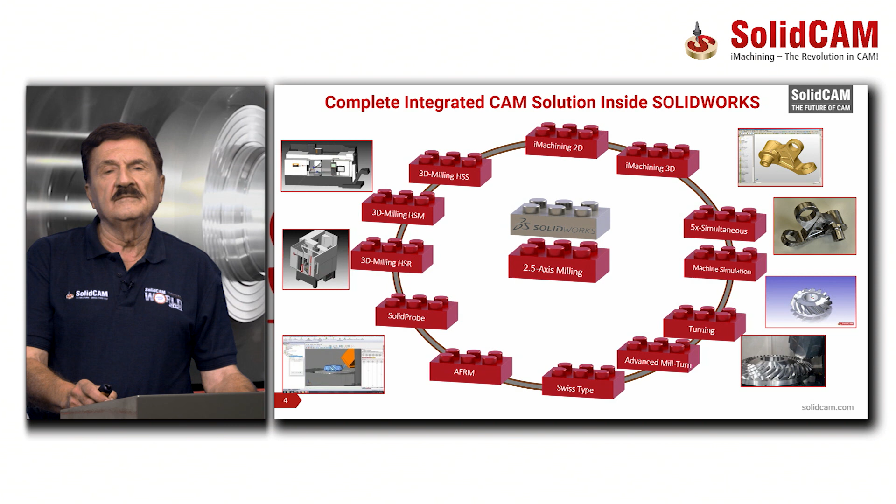We have our great technologies, iMachining 2D and iMachining 3D, a must for every customer, and I will explain more about it. To the right, you see our 5-axis simultaneous and machine simulation capabilities.

Our turning, advanced mill turn and swiss type - as you know, we have the best solution today in the market for these two categories, advanced mill turn and swiss type. And as you see on the left, we have also our product, SolidProbe, useful for any machine shop using probes.

So we say that SolidCAM is the one CAM solution for all your CNC machines, starting from 2.5D to 3D to 4-axis indexial, 5-axis indexial, 5-axis simultaneous, and advanced mill turn and swiss. And as your CNC machine becomes more complex, we give you more customer value to get your CAM programming done the fastest and easiest way.

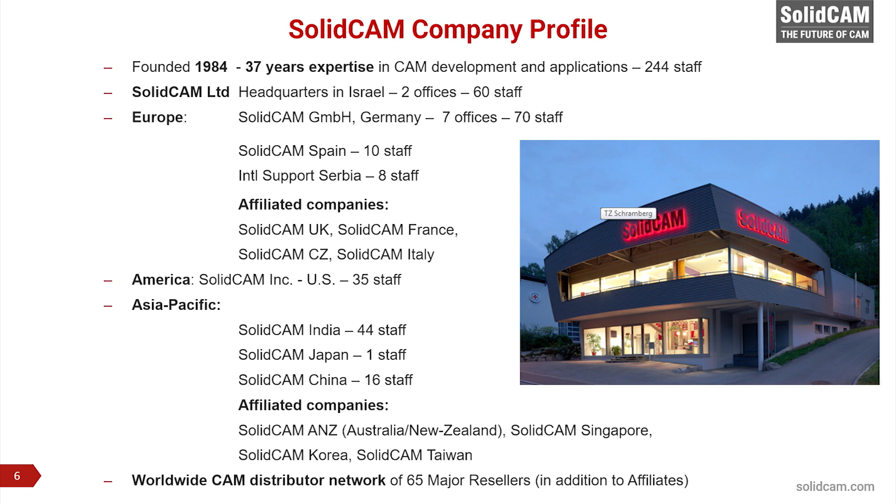A short review of our company today worldwide. We have 244 staff, our own staff worldwide. Located in our headquarters, we have 2 offices with 60 staff. SolidCAM GmbH is our European headquarters in Germany, with 7 offices and 70 staff. We have our newly established SolidCAM Spain with 10 staff, and our international support team in Serbia with 8 staff.

We also have affiliated companies in Europe: SolidCAM UK, SolidCAM France, SolidCAM CZ, and SolidCAM Italy. In North America, we have SolidCAM Incorporated, handling both US and Canada with 35 staff. In Asia Pacific, we have SolidCAM India, SolidCAM Japan, and SolidCAM China, and affiliated companies SolidCAM Australia and New Zealand, SolidCAM Singapore, SolidCAM Korea, and SolidCAM Taiwan.

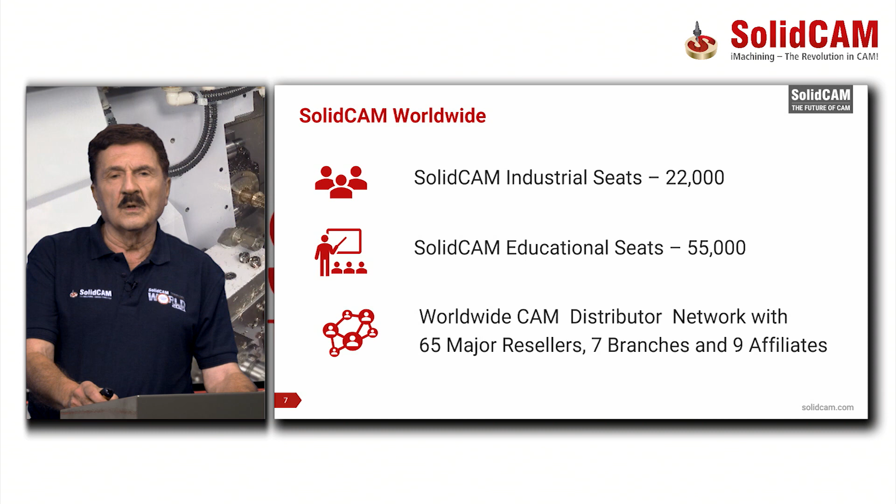In addition to all the branches and affiliates, we have a worldwide CAM distributor network of 65 major resellers. So as a complete picture today of SolidCAM worldwide, we have 22,000 SolidCAM industrial seats, 55,000 SolidCAM educational seats, and a worldwide CAM distributor network with 65 major resellers, 7 branches, and 9 affiliates.

You see here an example of our SolidCAM international customers. For example, in aerospace, we have Rafael, Dornier, Airbus. For automotive, you see Daimler Chrysler, Volkswagen, Nissan, Kia, Hyundai. We have customers in machine design, electronics, medical - for example, you see in the middle, Boston Scientific. This is one of our biggest customers in the US.

They are a very big customer of SolidWorks, and they have about 20 seats of SolidCAM, and they were our first customer in North America. We have customers in optics, military, consumer, energy, production shop, mold tool and die, prototyping, and technical education. So SolidCAM customers today include both small and medium-sized job shops, medium-sized engineering and manufacturing companies, and large aerospace and automotive companies.

Now I just want to talk about our integration. This is our strategy that led us to so much success. When we decided not to develop our own CAD system anymore, we had a CAD system in the past, and we decided to integrate into the famous CAD systems available. So we integrated into SolidWorks in 2000, finished our integration in 2002, and got our gold certified partner status in 2003. We have also had an OEM agreement with SolidWorks since 2003, where we could supply you with a complete CAD/CAM solution, an OEM of SolidWorks with SolidCAM.

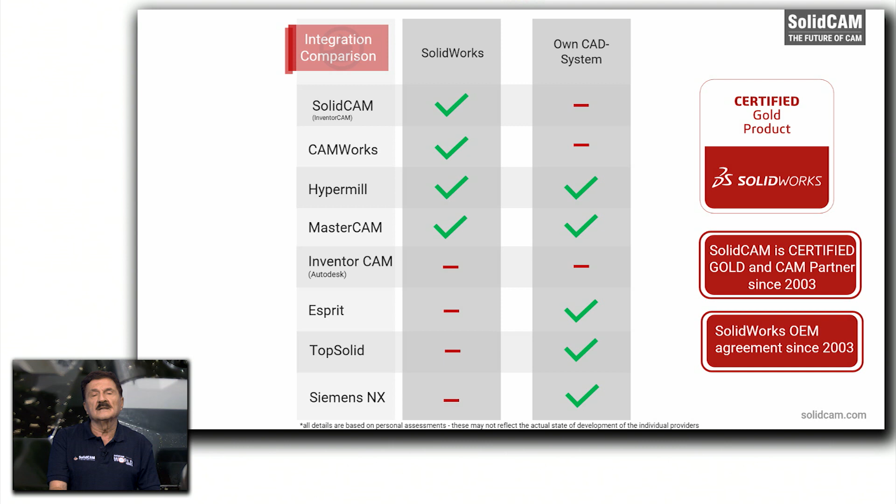So what happens if you have your own system, you put your major development into it, and what happens with the integration with SolidWorks is it withers away. So practically speaking, you can never find a happy customer anywhere using Mastercam integration in SolidWorks, and Mastercam always pushes the version with their own CAD system.

So today, if you are a customer already using SolidWorks for design of jigs, fixtures and other small designs, and you want to continue in the same environment, SolidCAM for you is the ultimate and perfect combination with your SolidWorks, because it's seamlessly integrated and you feel you are working in one system, SolidWorks and SolidCAM.

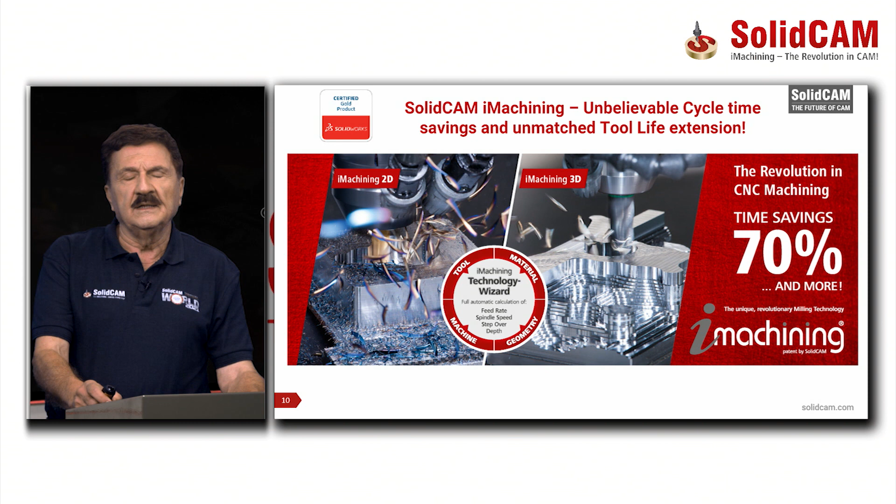Now I want to talk about our great SolidCAM iMachining. This technology provides unbelievable cycle time savings and unmatched tool life extension. Maybe many of you have already heard about this technology, maybe some haven't, so I'm going to make a short summary. As you see in this slide, we have two versions of iMachining: iMachining 2D for prismatic parts, and iMachining 3D for complex surface parts.

What are the advantages of iMachining 2D? First, increased productivity due to shorter cycle time, savings of 70% and more. You have dramatically increased tool life, sometimes as much as 5 times or even more, with the tool lasting much longer compared to regular toolpaths. You have unmatched hard material machining — for iMachining, the harder the material, the more the savings. You also have outstanding small tool performance, which is very important for different kinds of industries.

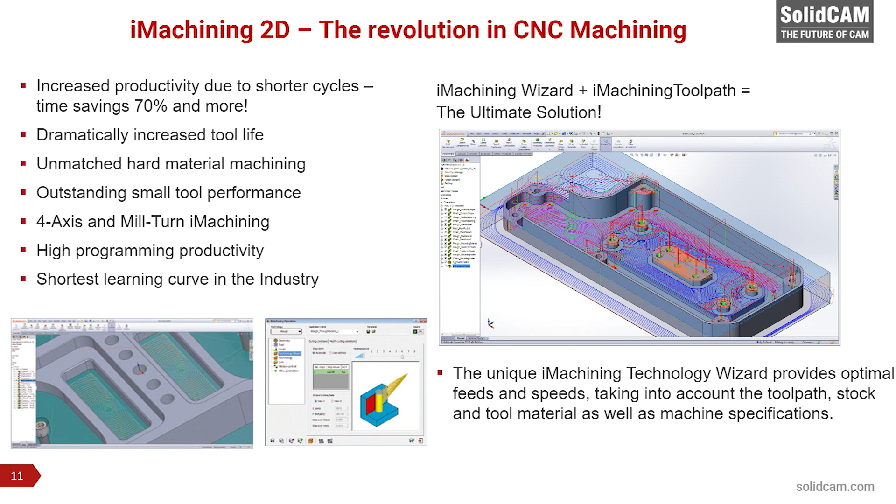You can use iMachining both in 4-axis and mill-turn, and we'll see some video on that. You also have very high programming productivity and a very short learning curve.

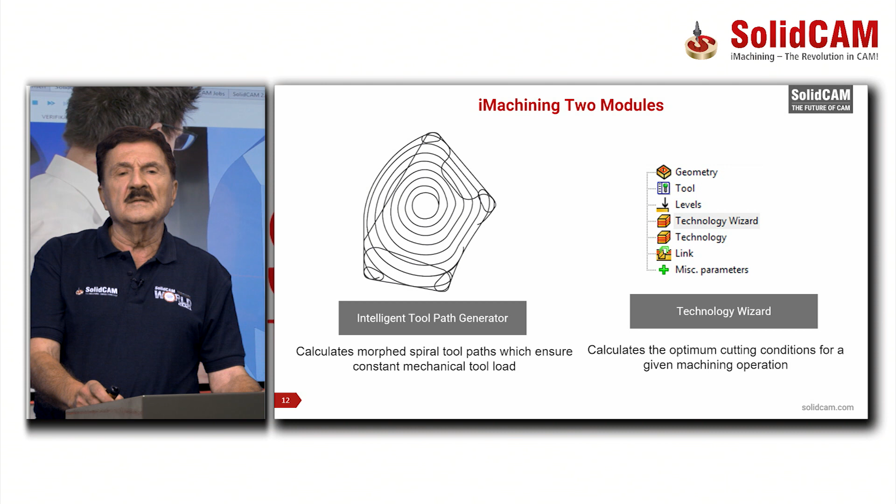So let's look more in depth at iMachining. iMachining has two modules. First, on the left, the intelligent toolpath generator. It calculates morphed spiral toolpaths, which are the most efficient toolpaths, and it always ensures a constant mechanical tool load on the tool while it's cutting.

On the right, you see the second module, the technology wizard, which is unique to SolidCAM. It calculates the optimum cutting conditions for any given point on the toolpath.

So what input does the user give to iMachining? You just define the minimum cutting angle you allow and the maximum cutting angle, let's say between 10 and 80 degrees. So while the cutting tool is working, the cutting angle varies according to the situation between the minimum and maximum, and as the cutting angle varies, the feed also varies.

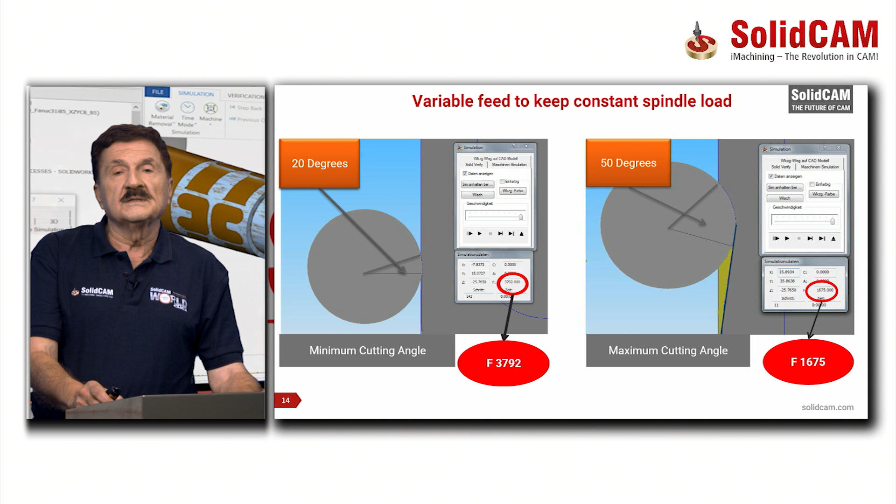For example, you see two examples: to the left, you have a high feed, because we have a small cutting angle, so you get a high feed. To the right, you see the cutting angle has increased, so the feed has reduced.

So these values are always varying along the toolpath — the cutting angle and the feed — but always the net result is constant load on the tool and constant spindle load. This is the unique character of iMachining.

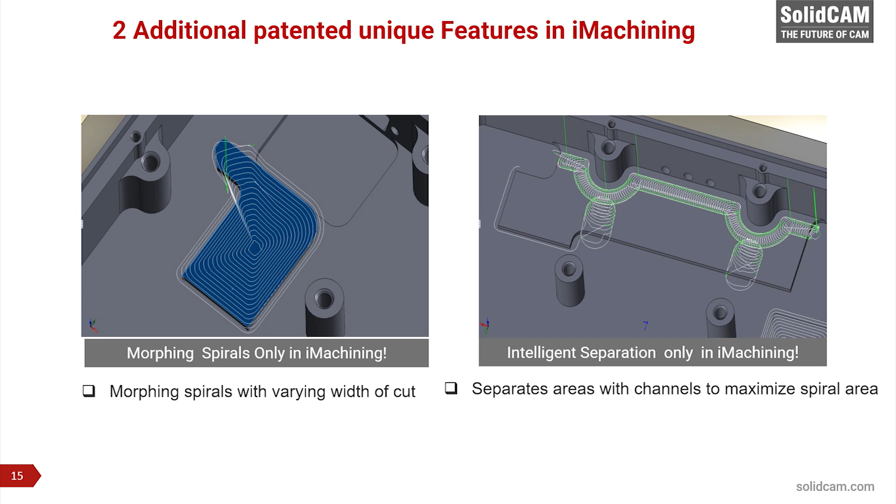Let's look at two additional patented unique features in iMachining. To the left, you see our morphing spirals. These are spirals that take the shape of the area below it, morphing itself to fit. And the second feature is our intelligent separation in iMachining using toroidal toolpaths.

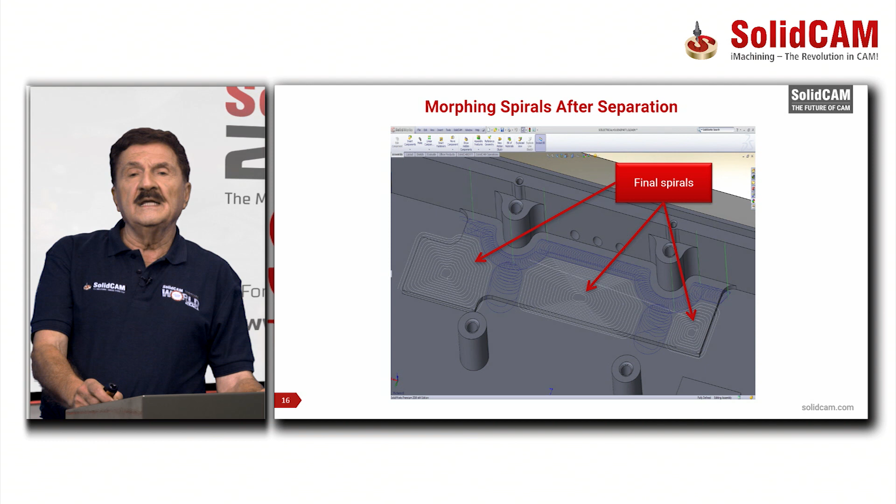Let's see an example. This area had to be machined with iMachining, but you couldn't do it with one morphed spiral. So, as you see in blue, the toroidal toolpath divided this area into 3 sub-areas, and each sub-area is machined using morphed spiral. The target of iMachining always is to do the maximum of the cutting using morphed spiral.

With iMachining, we not only do the roughing, but also the rest roughing and finish. So iMachining 2D is unique in that it completes the whole process for prismatic parts: roughing, rest roughing, and finishing.

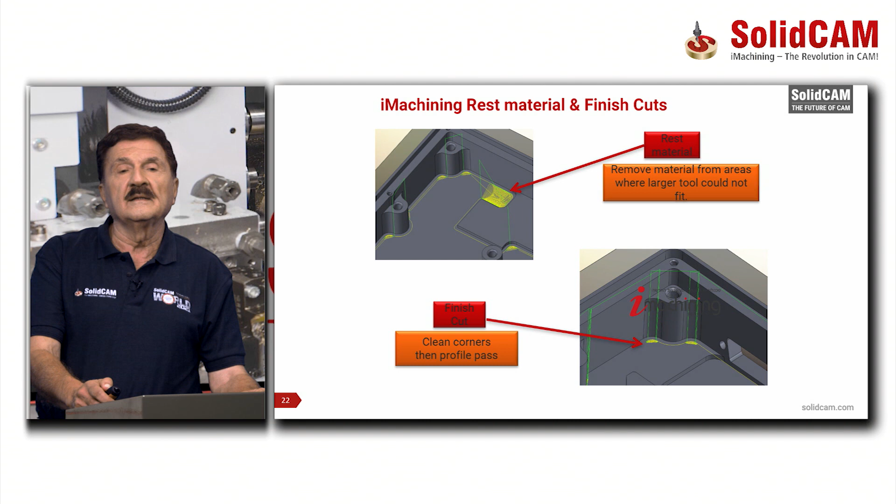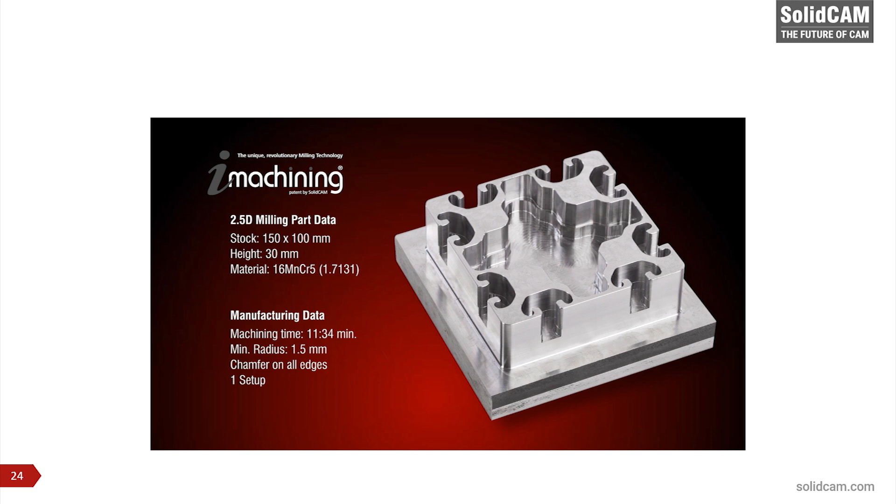Okay, here we see the material cutting starting. See how deep the cut is. Usually in iMachining, the cut is always maximum depth. Now the tool is trying to get into the full depth of that pocket, and then when it reaches the bottom, it will start doing the morphed spiral cutting of this hard material.

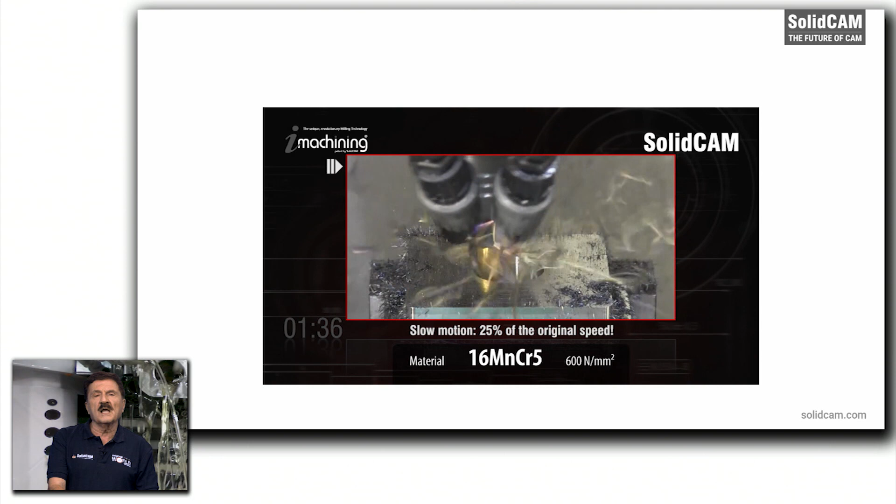The speed at which it works, you'd think it's aluminum. No, it's 16MnCr5 steel, and you see the maximum speed at which the tool is working. And you see the chips are always the same size. This is a trademark of iMachining.

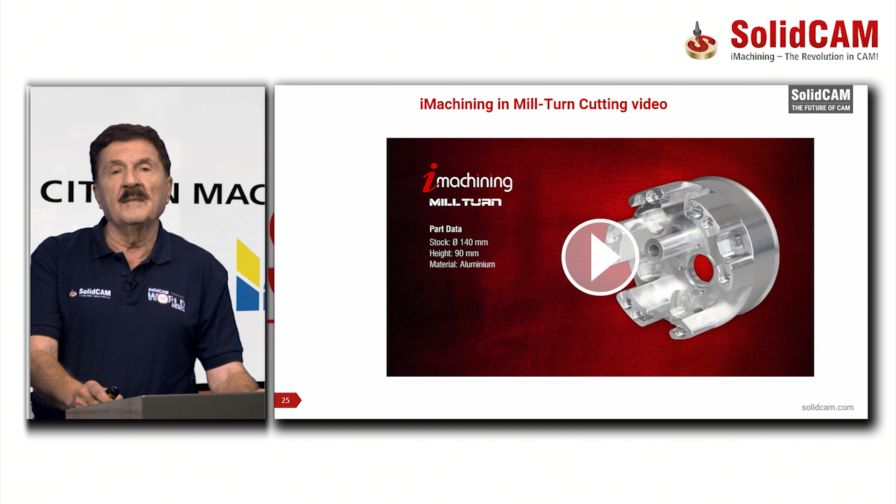iMachining also can be used not only for 2.5D prismatic parts, but as I said before, also in mill turn. Let's see an example of a medical part cutting in a mill turn using iMachining.

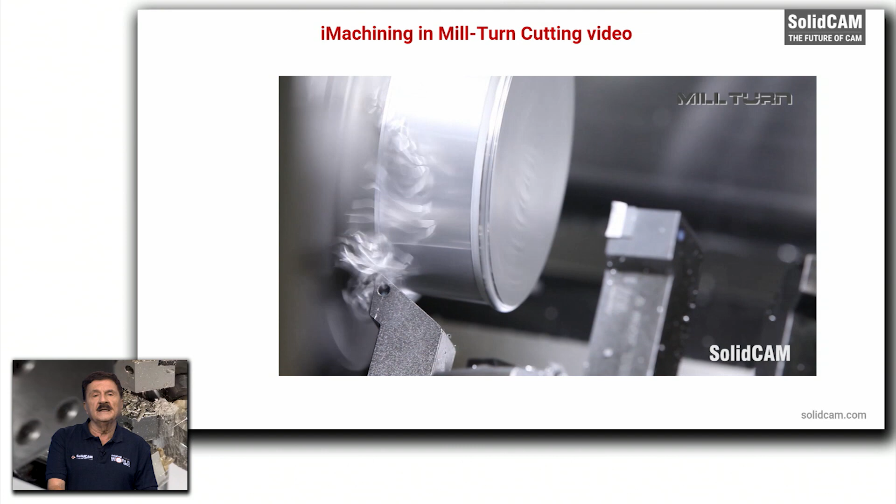This material in this case is aluminum, being cut on a Mazak Integrex machine at a medical customer in Germany. It starts with just simple turning. Here you see it's doing the iMachining toolpath in the 4th axis.

You see again the chip size, trademark of iMachining — always chips are of the same size. Here again, it's doing iMachining of an open pocket, not a closed pocket.

It starts from the outside with a trochoidal toolpath. Usually when you have to cut an open pocket, you start with the trochoidal, and now it's doing again morphed spiral. So it's always a combination of maximum morphed spiral with some trochoidal.

Again, here you see morphed spiral cutting.

So we've talked about iMachining 2D. Now I want to talk about the second module, iMachining 3D, that utilizes proven iMachining 2D and technology wizard algorithms. iMachining 3D is so amazing that it can reach sometimes 90% savings. And by the way, iMachining 3D can be used for both 3D surfaces and also prismatic parts.

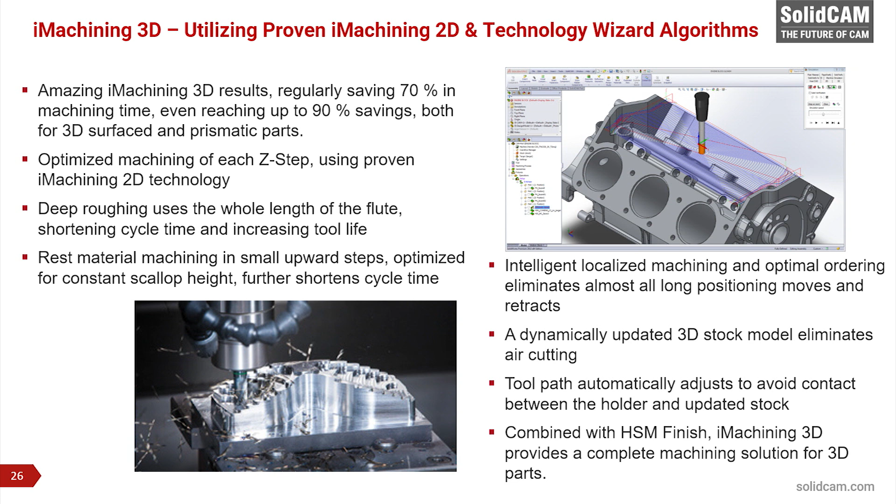If you have a prismatic part with a lot of pockets, you could also do all the roughing and rest roughing of these pockets using iMachining 3D. iMachining 3D does optimized machining at each Z step, starting by doing deep roughing using the whole length of the flute, and then rest material machining is done in small upward steps.

Let's look more at how iMachining 3D works. Basically, iMachining 3D does optimal Z-slice machining. It slices all along the height of the 3D part, and achieves the shortest possible cycle time by combining all these Z slices. It always starts with deep step-down roughing, as I said before.

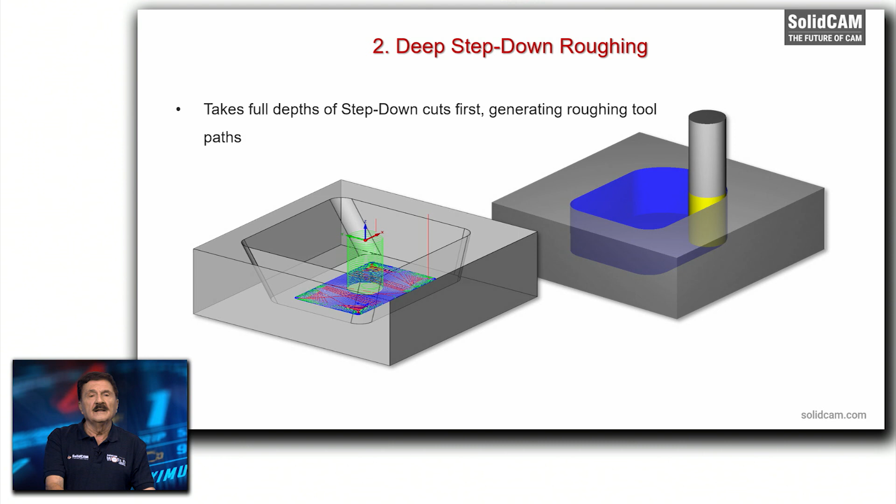It takes the full depth, first generating the roughing toolpath, as you see here, in this type of pocket that has different slopes on both sides. So first it starts with the roughing, and then it does scallop-driven intelligent step-up. If you look at these two slopes, they are different — one has a higher slope, one has less slope.

We do it per slope. Step-up changes dynamically to maintain the same scallop throughout the operation. So as you see to the right, this sloped face was done using only 3 steps because it has a higher slope, and the one to the left was done with many more steps. But always the scallop is constant.

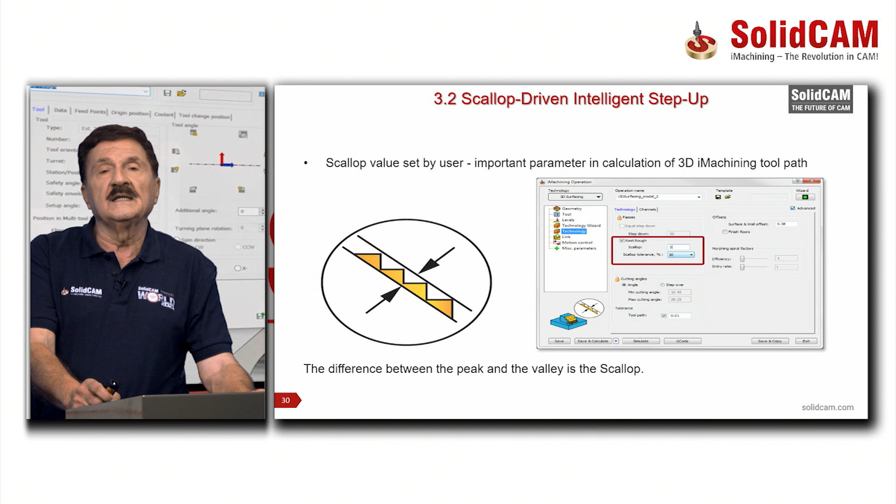This scallop value is usually set by the user, and it's an important parameter in the calculation of 3D machining. The smaller the scallop, obviously, the more calculation time for 3D machining.

Again, when you do the step-up procedure, the axial depth of cut gets smaller as you go upwards, every time a new higher step is machined. iMachining increases the feed and engagement angle of the tool paths that machine the higher steps. As a result, the machining time of each higher step is shorter than if it had been done without the feed and angle increase.

Another feature of iMachining 3D: negligible repositioning, achieved by optimal toolpath sorting and 3D Z-level linking. Nearly no air cutting at all—it cuts only where needed.

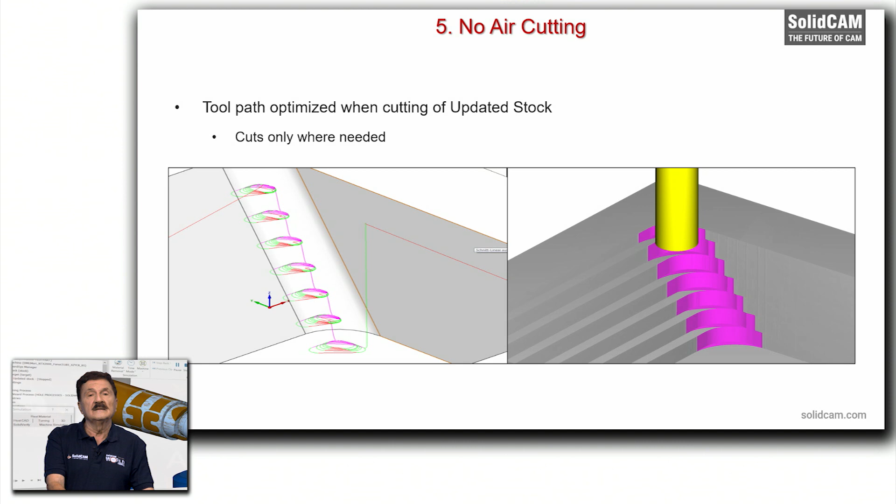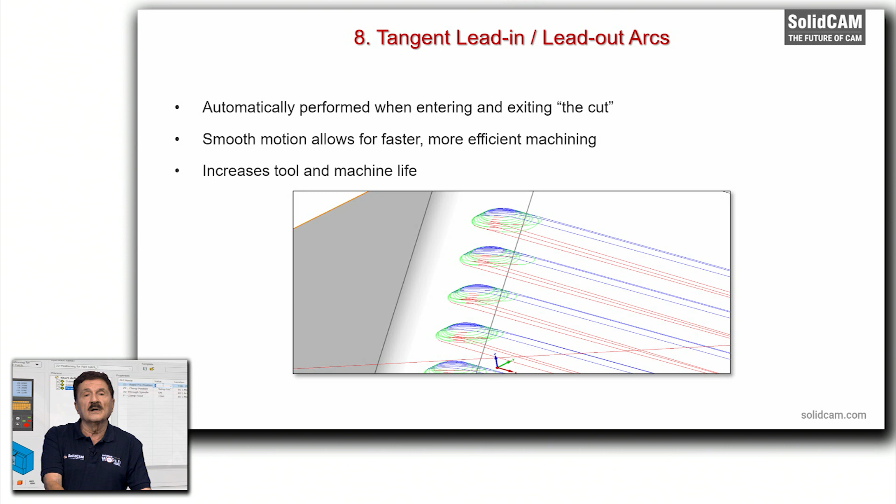Again, the wizard is working here at every one of the slices, and the cutting conditions are automated to maximize performance and efficiency. We always have tangent lead-in, lead-out arcs, enabling smooth motion, allowing for faster, more efficient machining, and this also increases both tool and machine life.

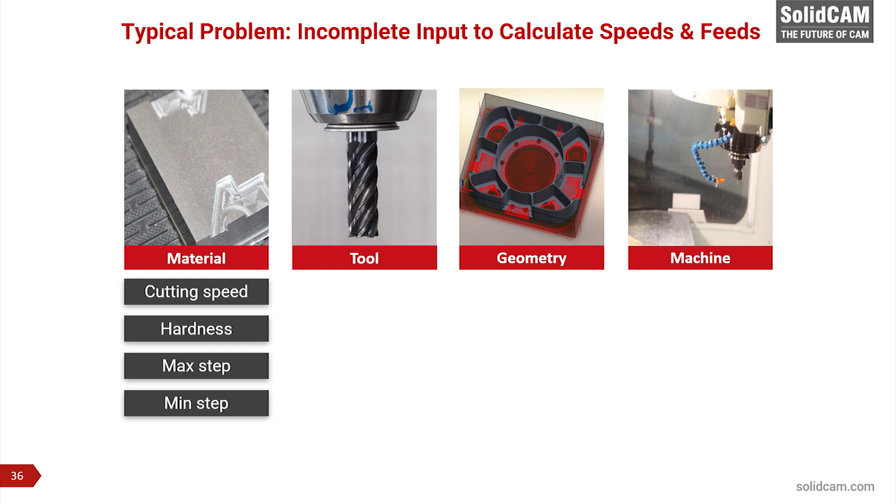First, all the material properties of the material you are cutting have to be taken into account: the cutting speed, the hardness, maximum step, minimum step. All the parameters of the cutting tool, the depth of the geometry, all the parameters of the CNC machine—maximum speed, maximum feed, maximum power.

So basically, for somebody trying to figure out what is the optimum feed and speed, taking into account all these parameters is nearly mission impossible, and you need a lifetime of experience to do that well. And even after a lifetime of experience, suddenly you meet a new type of material you haven't cut before, and you're stuck again, having to go and do trial and error.

With the iMachining technology wizard, we automatically take the guesswork out of setting how fast your CNC machine should spin and feed the cutting tool. And we adjust the stepovers and how deep to cut.

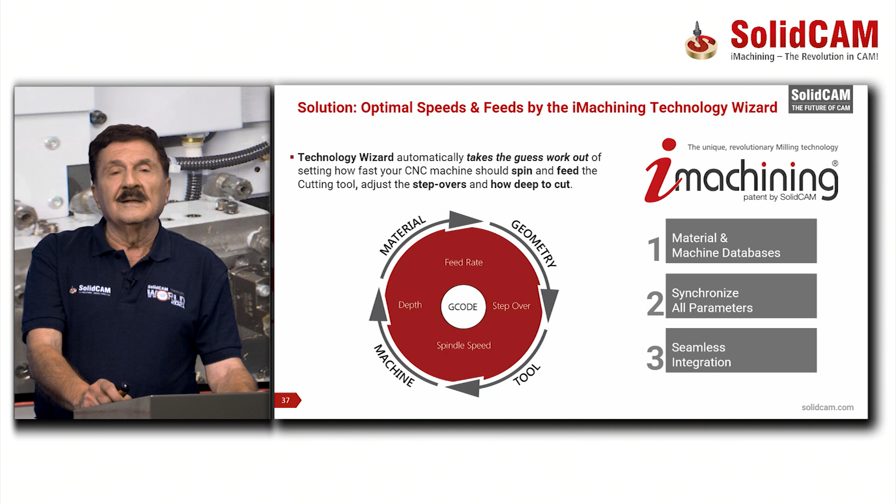As you see in the circle figure at the bottom, the wizard takes into account the material properties, the geometry depth, the tool properties, and the machine properties, and automatically calculates the optimum feeds and speeds, and also the depth and stepover. Obviously, as input to the iMachining wizard, we have to feed in all the material and machine databases that have all the parameters of these materials and CNC machines.

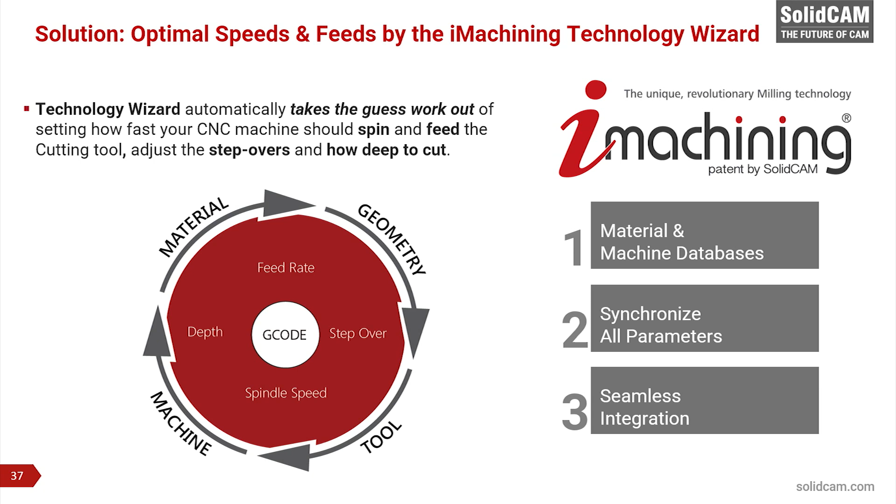The only control you have over the wizard is telling it how powerful it will work. We have levels from 1 to 8, with a slider. If you want minimum material removal rate, you give it level 1. If you want maximum metal removal rate, you give it level 8.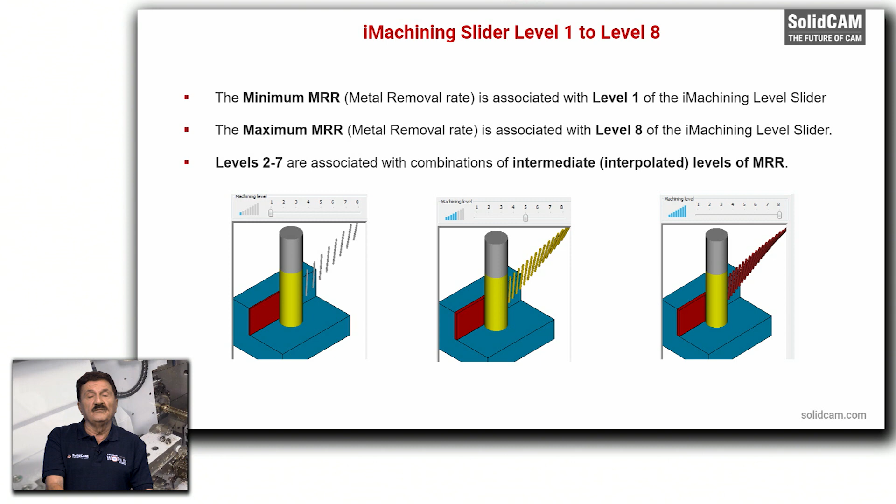So basically, if you are cutting a new part, you probably start with level 4, get the feeling of it, and maybe later go to the maximum level. This is the only thing you need to control when cutting with iMachining.

Let's see actual results at customers. Here is an example of iMachining 2D savings in aluminum at a customer.

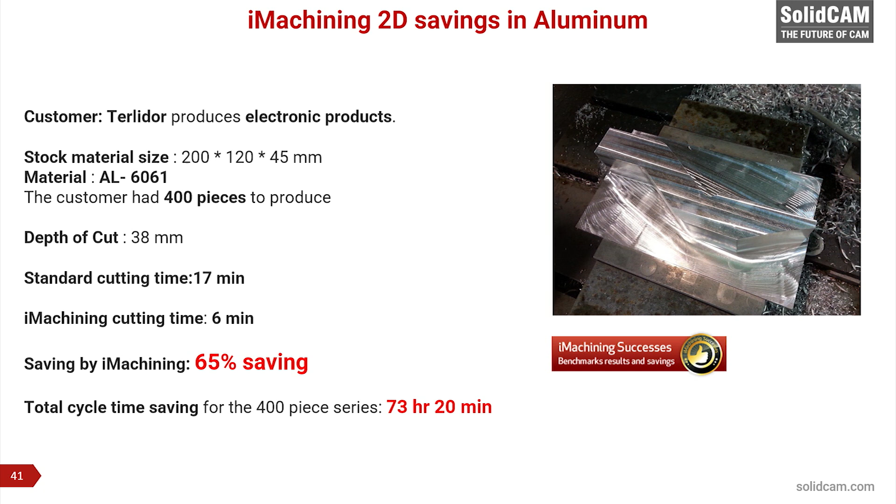The depth of cut was 38 millimeters, and the standard cutting time, when I say standard, is with an offset style toolpath, as opposed to morph spiral in iMachining. iMachining reduced the cutting time from 17 minutes to 6 minutes, a 65% saving, and the customer had to do 400 pieces, so he saved 73 hours 20 minutes in cutting time.

Here's an example of iMachining 2D saving in titanium. Again, the time of cutting was reduced dramatically from 17 minutes to 3.5 minutes, an 80% saving. As I said before, the harder the material, the more savings is provided with iMachining.

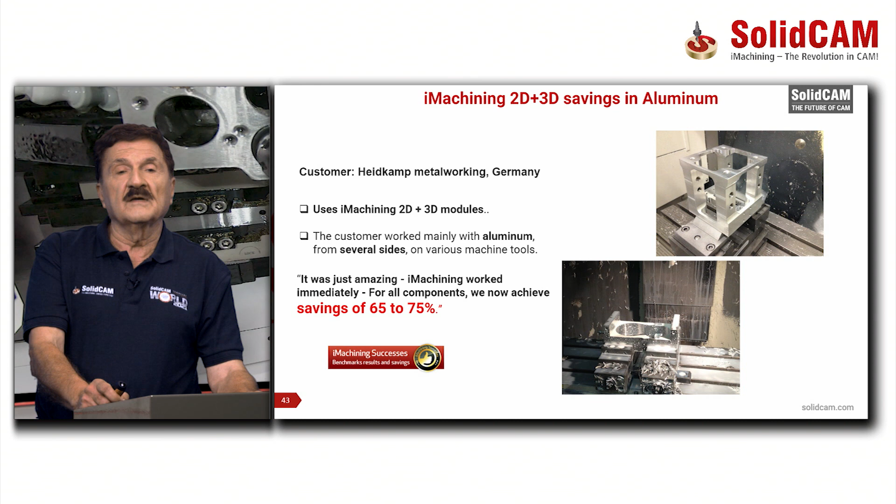Here's another customer doing both iMachining 2D and 3D, and he says it was just amazing. For all components, they now achieve savings of 65 to 75%, as you see in the example here on the part to the right.

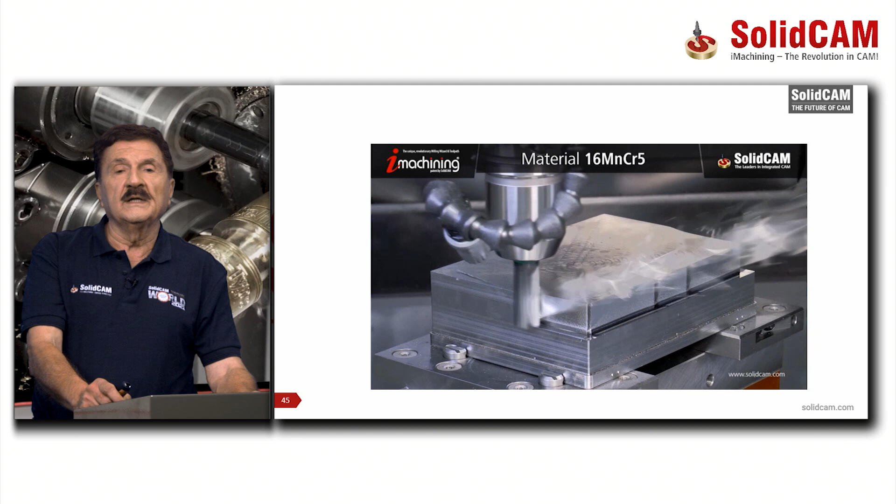Let's see here an example of iMachining 3D cutting of a 3D surfaced part. It's a mold part. See, it's going to do the whole depth in 2 steps. In the beginning, the roughing. As I said, we always try to use the maximum depth of the flute of the tool.

Now it's doing the step up. As I said, according to the scallop defined by the user, we do the step up. And you notice we only cut in the areas that need cutting. We don't go all around like in other technologies. We just do the step up in areas that have rest material and have to be cut during the step up.

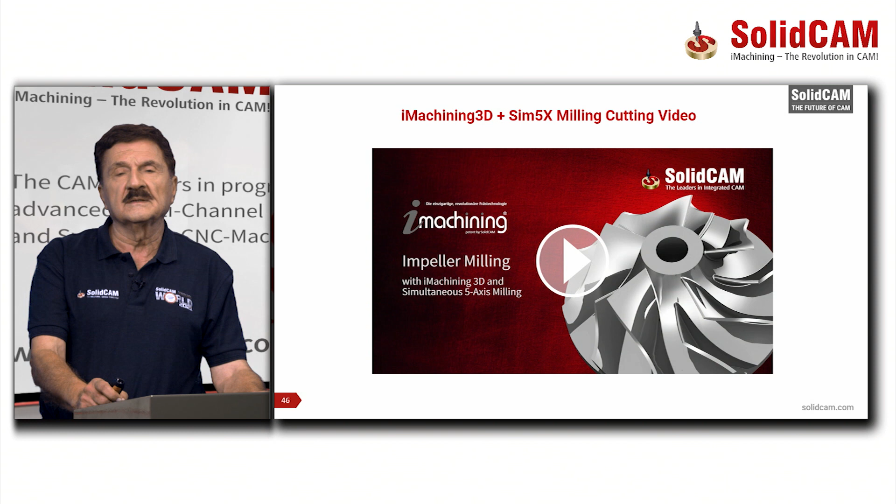Here we see again an example of a combination of iMachining 3D with simultaneous 5-axis cutting. By the way, SolidCAM today has one of the best, highest simultaneous 5-axis products in the market. So let's see here the cutting of this part. As I said, we start with iMachining 3D to do the roughing, and then we use the simultaneous 5-axis for the finish. We are doing here the machining of an impeller.

Again, the trademark of iMachining, it goes very deep for the roughing, using the full depth of the flute. As you see in this, because of the length of the tool, it will do it in 2 steps, the roughing with iMachining 3D.

Here it's doing the rest roughing. Now it's doing the step up, as I said, according to the scallop defined by the user. And as I said again, the step up is only done where it's needed, where there is rest material to be taken out. And now we start with the finish using simultaneous 5-axis cutting.

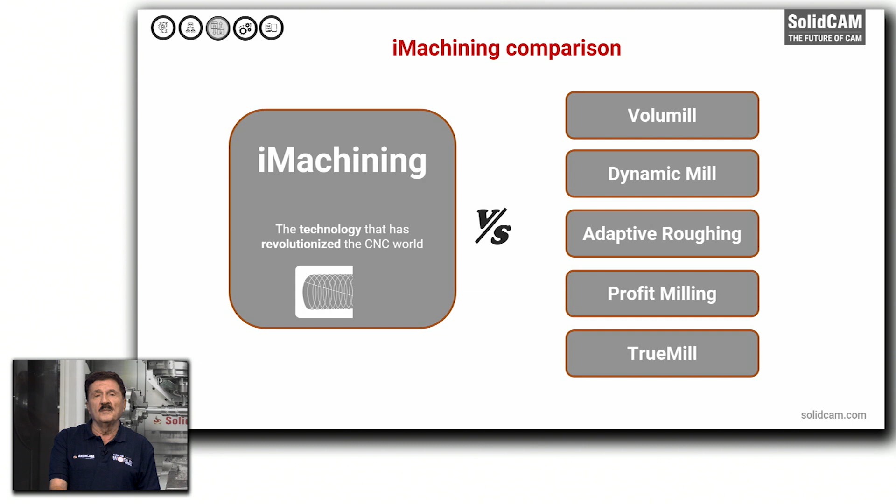So now I come to a very interesting issue. Many companies, other CAM companies, say they have similar technologies to iMachining. Actually, iMachining is unique, and I'm going to show you now why. We are going to compare iMachining to VoluMill, which is a model used by many of our CAM competitors, Dynamic Mill, that's Mastercam technology, Adaptive Roughing, that's NX CAM technology, Profit Milling is Esprit, and TrueMill of Surfcam. Okay, let's compare now according to certain subjects.

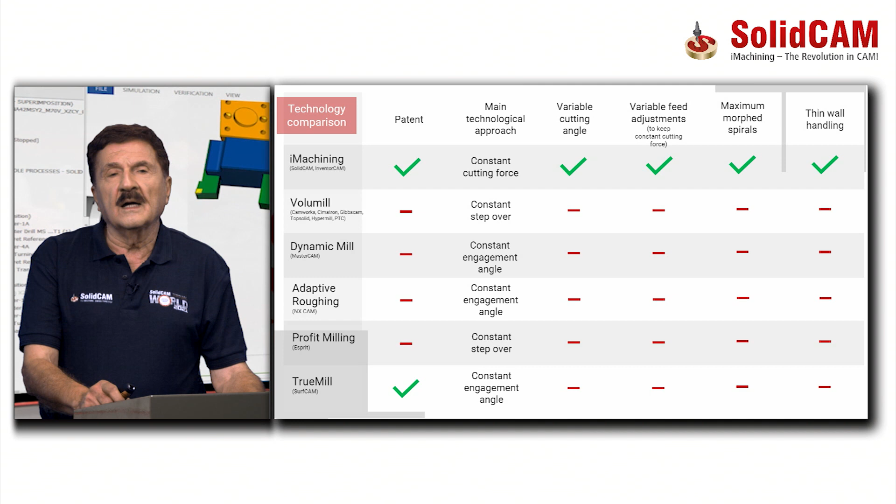First, patents. iMachining has many patents, as I showed before. None of the others have any patents, only TrueMill, and you know SurfCAM today is not in such a good situation in the market. Now, what is unique about iMachining is the main technological approach.

We guarantee constant cutting force on the tool, all along the toolpath. The others, like VoluMill, have constant step over. Dynamic Mill and Adaptive Roughing have constant engagement angle. And again, Profit Milling, constant step over, and TrueMill, constant engagement angle. None of them has something similar to our constant cutting force technology. So we are the only ones who are able, as I showed before, to vary the cutting angle as needed along the toolpath and to vary the feed, always to make sure that we have constant cutting force on the tool. As you see, none of the others can do that.

We have also maximum morph spirals, and as I said, morph spirals are the most efficient toolpath. We have excellent thin wall handling. None of the others can do that.

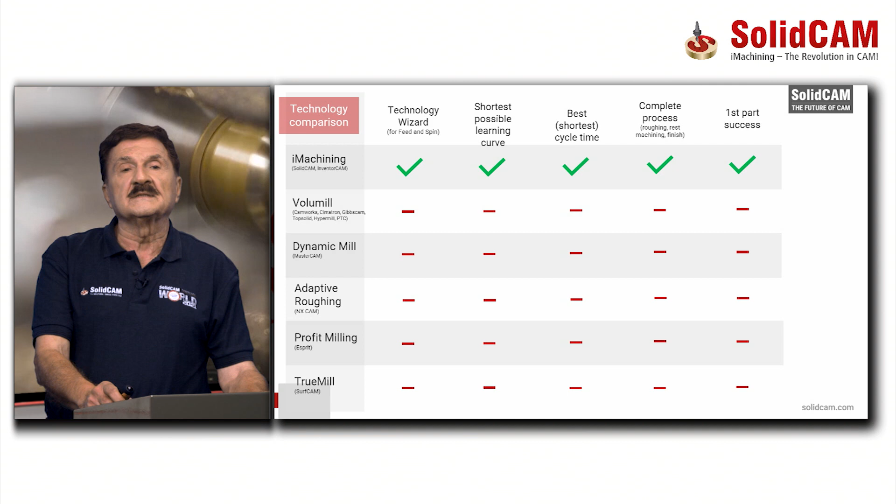Let's continue. We are the only ones who have a technology wizard. With the others, you have to guess the feeds and speeds. I would say we have the shortest learning curve. In cycle time, we had many benchmarks against our competitors, and we always had the fastest cutting, the shortest cycle time. We are the only ones who can do in iMachining 2D the complete process: roughing, rest roughing, and finishing. And because of the combination of all these advantages, we could guarantee you first part success, very important many times.

Now, I want to say that we have something very interesting. We have integrated our iMachining technology inside NXCAM. There are many NXCAM users in the world, and they can all benefit now by having iMachining 2D and 3D fully integrated in their product with the same user interface they are used to. So I recommend anybody using NXCAM today to use iMachining. He will save a lot in cost because of cycle time savings and tool life savings.

Last but not least, iMachining guarantees reduced CNC machine wear. The iMachining toolpath, combined with the optimum cutting conditions provided by the technology wizard, ensures constant load on the tool in any situation. iMachining makes sure the spindle load will range from 4% to 17% of the maximum possible spindle power. Amazing, right? You see the machine working so fast, and still the spindle load is maybe 17%.

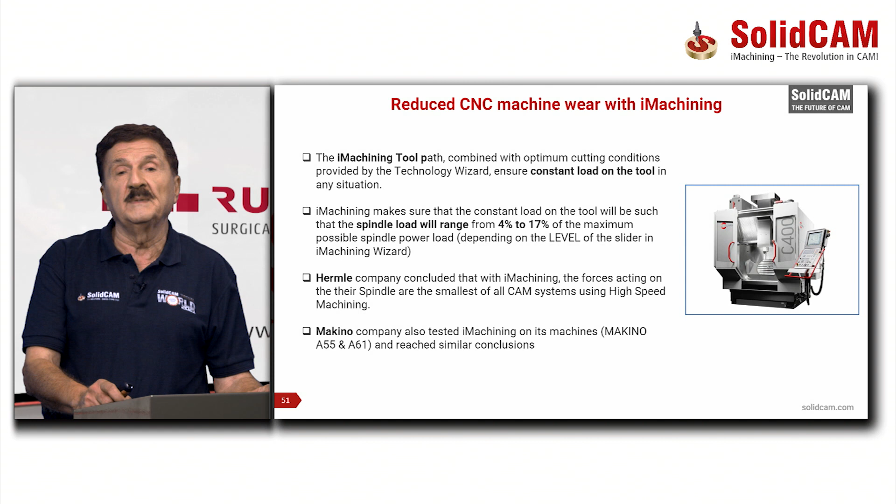Few machine tool companies have checked iMachining, for example Hermle in Germany, and they confirmed what we said about our savings and our important contribution to machine tool life. Also Makino in Japan have tested iMachining and came to the same conclusions.

Now I want to talk a few words about our SolidCAM 2021 version, which we released this year, and which we call our latest and greatest. By the way, this week we have released SolidCAM 2021 SP3, and I recommend every customer of SolidCAM on subscription to get this amazing version.

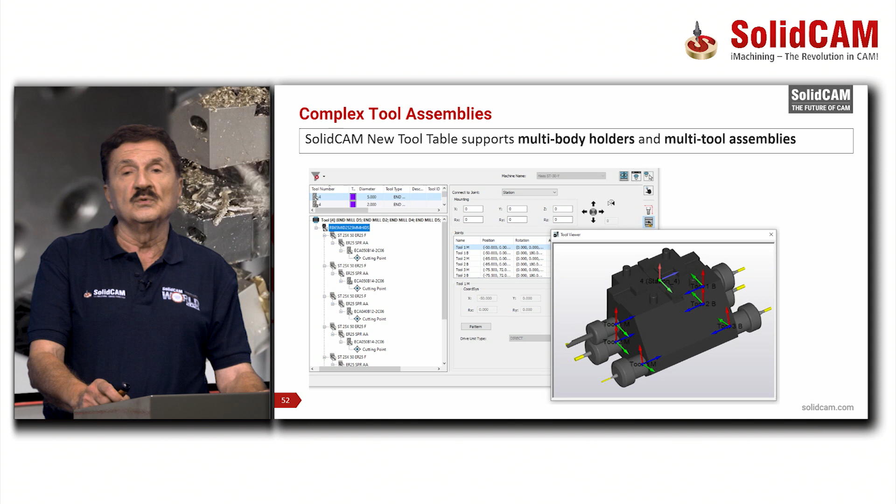Some of the highlights of SolidCAM 2021: we support complex tool assemblies. In the SolidCAM new tool table, we support multi-body holders and multi-tool assemblies. This is important for complex mill turn and Swiss machines.

Now, let's go back again and talk about mill turn. Today, SolidCAM is the perfect solution for multi-turret and multi-spindle CNC machines with ultimate programming ease of use, flexibility, and configurability. And obviously, SolidCAM completely supports Swiss-type machines, including multi-channel synchronization.

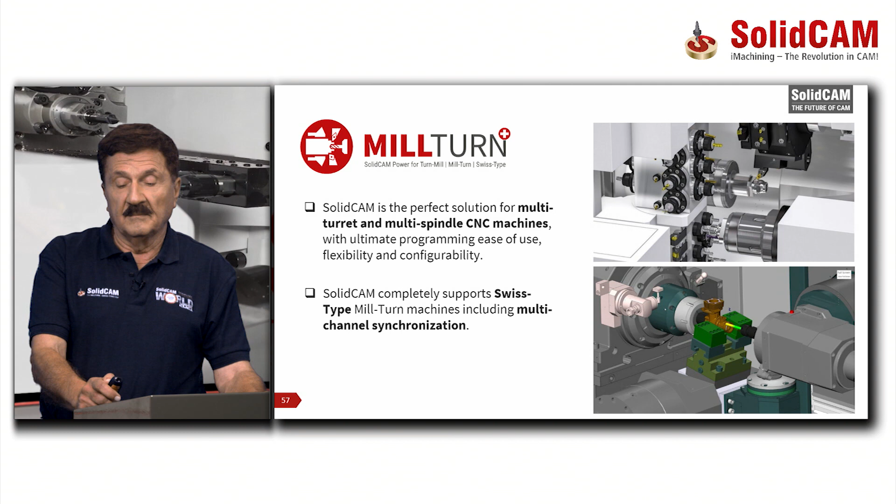I want to talk a little more about support of Swiss machines. Why do Swiss-type machine customers need CAM? Because in the past, what they were doing was mainly G-code programming right on the Swiss machine, doing the same part for a couple of months. These days, I've seen customers using Swiss-type machines do 3-4 new parts every week. So not only are they doing more parts, but the parts themselves are becoming more complex, and the Swiss machines themselves are getting more complex. So programming and managing sync codes and axis patterns for multi-channel machines has become very hard to do with G-code.

Again, if you are programming with G-code, you don't have any simulation or verification of the toolpath, which is really crucial. So any Swiss-type machine user doing programming by G-code today really has to upgrade, because if he has one programmer doing this programming with G-code and that programmer quits, it will be nearly impossible to find a new one to train to do this Swiss-type programming manually by G-code.

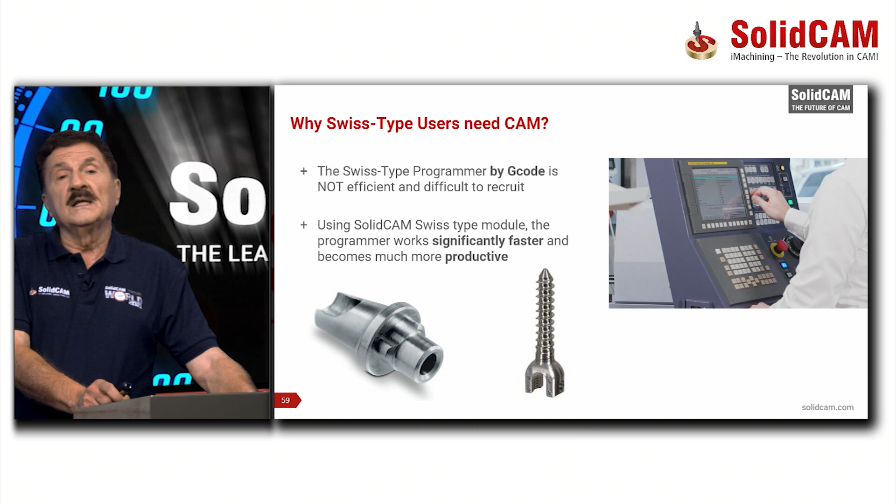So by using the SolidCAM Swiss-type modules, the CAM programmer works significantly faster and becomes much more productive. SolidCAM supports all the functions today for Swiss-type machines, including multi-channel synchronization, as I said.

Now I'm talking to you as SolidCAM resellers. You have the #1 Swiss-type product in SolidCAM today. So if you want to be #1 in Swiss-type sales and support, you need a Swiss CNC expert. But if you don't have such an expert today, we give very good task-based training to any technical staff of our resellers and branches. We have a great trainer, Marina Vilkina, who is an expert in this type of machine and kinematics of mill-turn machines and in post-processors, and she will give your staff the best training.

It's task-based training, where basically she sends the person doing the training videos to watch and then tasks to do, and then he answers through videos also. What's the advantage of this? He can do it in his own time.

There's no specific time that he has to sit in front of the computer. He can do it in his own time. And we have trained till now about 50 of our technical staff and reseller staff worldwide.

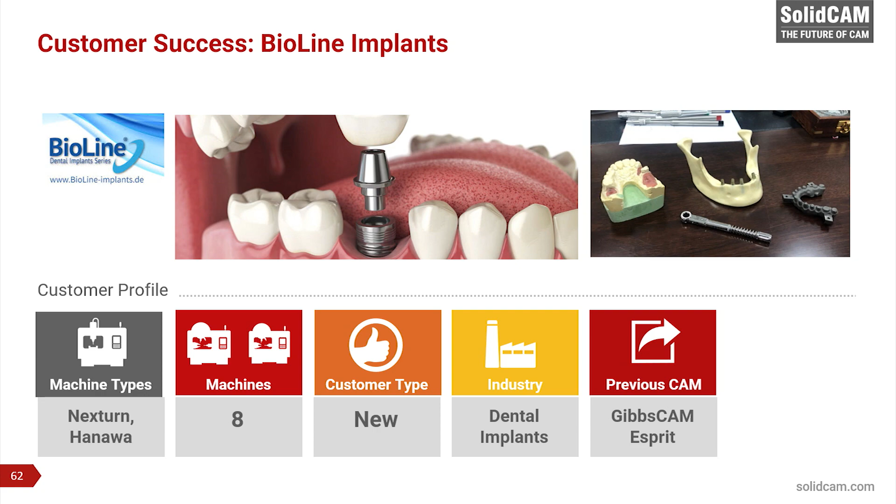Today we have post-processors for all needed CNC machines, including Star, Citizen, Tornos, Hanwha, Tsugami, and whatever is needed. Our technical team in Serbia, managed by Daniel Durica, can assist you as a reseller to make any new post that you need.

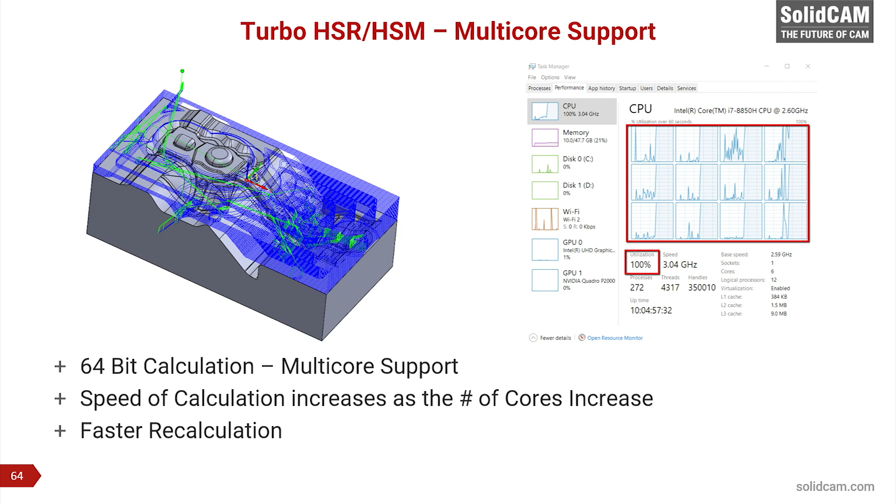Something very interesting in SolidCAM 2021 is also our Turbo HSR, HSM multi-core support. We use 64-bit calculation and multi-core support. So the speed of calculation, both HSR and HSM, increases dramatically as the number of cores increase, which is very important for the calculation time of these technologies.

We have also released additional important functionality for our simultaneous 5-axis, including edge breaking, edge trimming, and auto 3+2 roughing. We have done many webinars on these functionalities, and you could watch them on our website.

Now I want to talk about something interesting about the SolidCAM company. We say SolidCAM today is a strong, independent, customer-focused CAM company providing a complete CAM system. With our powerful customer-centric R&D, we keep supporting our CNC customers up to the most complex mill turns and Swiss CNCs.

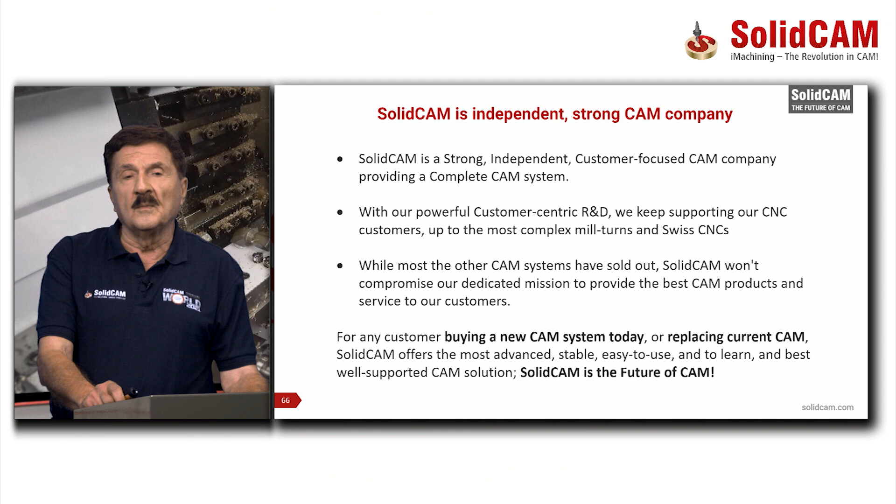So while most of the other CAM systems have sold out to bigger companies, as you have been hearing all along in the last few years, including the latest sale just a month ago, SolidCAM will always be independent and won't compromise our dedicated mission to provide the best CAM products and service to our customers.

So our prospect is, for any customer today buying a new CAM system or replacing a current CAM, SolidCAM offers the most advanced, stable, easy to use and to learn, and best well-supported CAM solution. We say it shortly: SolidCAM is the future of CAM.

And again, I want to repeat, it's not only about the product, it's also about the service. We provide today, through our branches, affiliates, and resellers, the best SolidCAM 5-star support, both for training, technical support, and post-processor support. We have the best CAM teams doing that for all our customers. So we are proud we have this combination of the best product and the best service.

Let me talk a little about what are our major new projects coming. As I said, today we are the most advanced in the technologies of mill turn and Swiss type, and we are always doing the next phases to support these complex machines.

We are developing a completely new concept we call the CAM project, where we could handle multi-CAM parts on multi-CNC machines. You see, on a tombstone there are multi-CAM parts, but we are going further than that. We can support multi-CAM parts on multi-CNC machines. This will be a unique feature of SolidCAM versus all competitors.

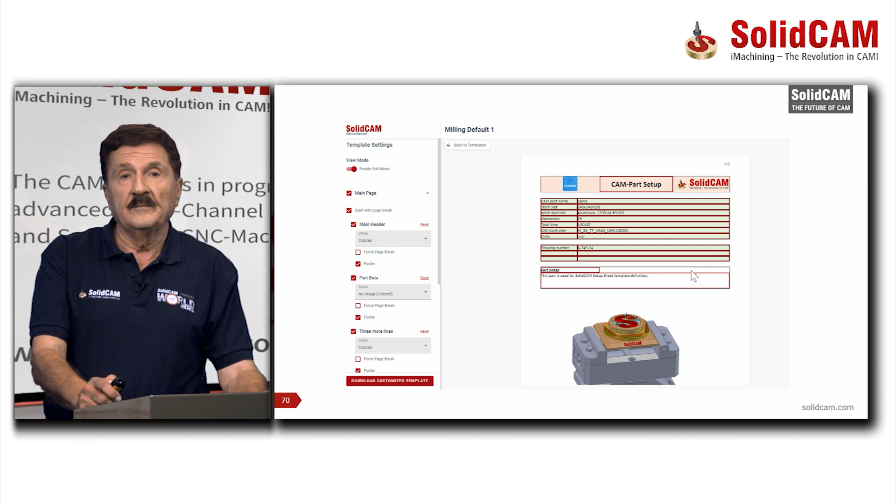Here is an example of one screen in the web-based configurator, where you could define the contents of the setup sheet for a specific template.

Now let's talk about Solid CNC. We have 20,000 customers using SolidCAM and happy with it. What can we do to help them get more jobs for their CNC machine shop? So we decided to create Solid CNC, a marketplace for CNC jobs.

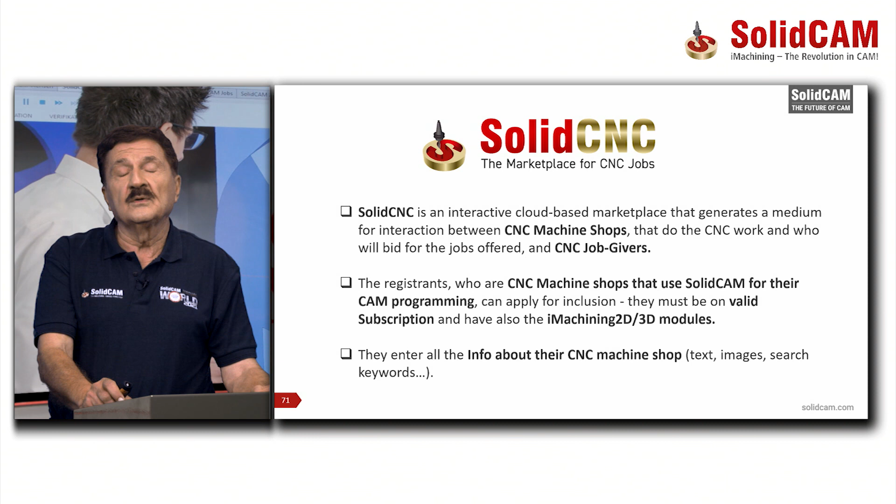It's a web-based website and application where all SolidCAM customers can register and put in data about their machine shop and machines. There's only one condition to register: you need to be on valid subscription and have iMachining 2D and 3D. Only if you have our latest version, SolidCAM 2021, with iMachining 2D and 3D, do we know you'll give the best quote to any job giver. So if you go on subscription and buy iMachining 2D and 3D, you could be registered in our Solid CNC marketplace. And we are going to do a lot of marketing for this marketplace so that job givers can find you there.

This is an example of some of the screens of Solid CNC. Here, as a customer registering, you select the industry type you want to support and the workshop capabilities you have. You could enter information about your CNC machines, so that any job giver can look at your capabilities.

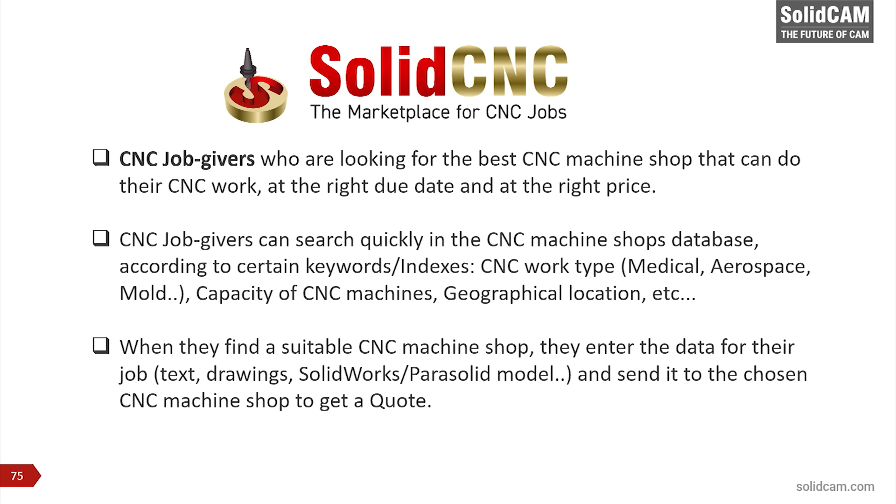The CNC job givers looking for the best CNC machine shop to do their work can come to this marketplace and search by CNC work type, capacity of your CNC machine, and geographical location. Someone could be in a different geography but want work done in another one. When they find a suitable CNC machine shop, they will put their data on the Solid CNC marketplace and ask for a quotation.

Here's another example, from a job giver's perspective: defining what kind of industry type he wants the customer doing his work to be in, then uploading his model data — it could be a SolidWorks model or a STEP model — and giving additional information about what he needs for his specific job.

Now we come to our next amazing product, SolidFlow. Why did we come up with this idea? We studied what you, our customers in CNC machine shops, need to get better production. Talking to many potential customers, we found that one of their main problems is doing good scheduling of CNC jobs in their machine shop. Checking the market, we found an amazing technology developed in the United States called Protected Flow Manufacturing, by a company called LillyWorks, which has dealt with ERP and scheduling for nearly 40 years. We created a partnership where we OEM their Protected Flow Manufacturing technology and offer it to all of you as our product called SolidFlow.

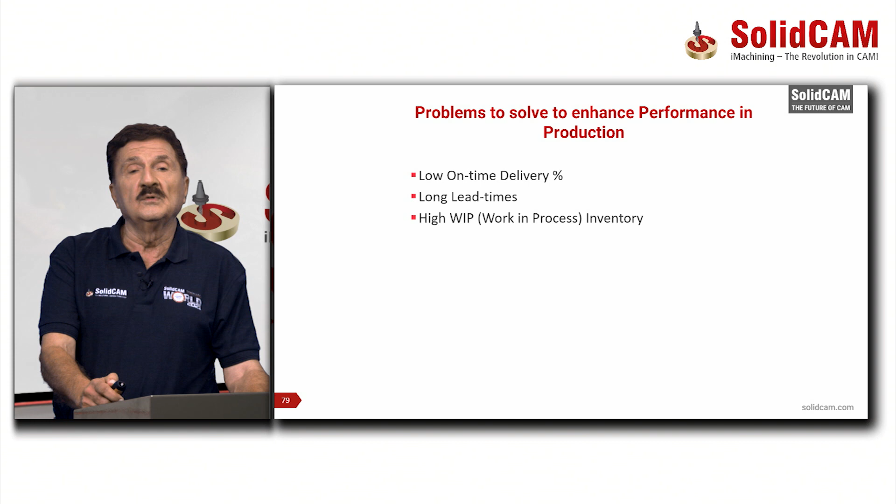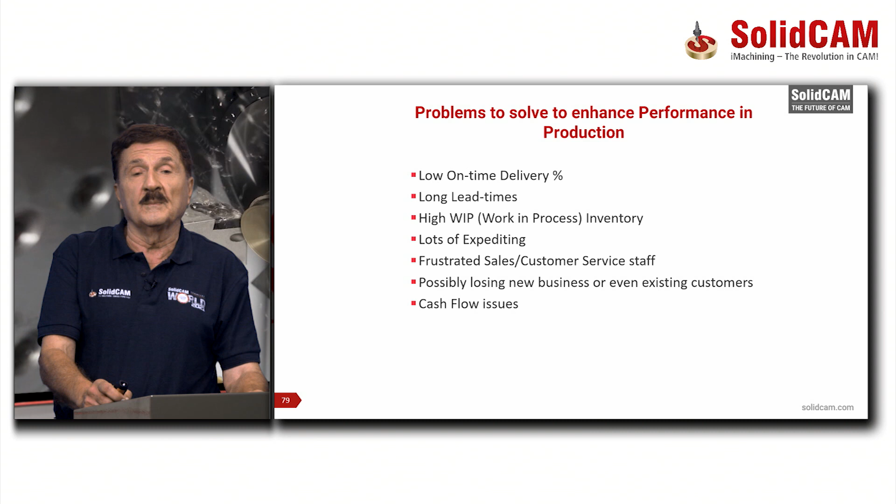High work-in-process inventory, too many jobs working simultaneously. Lots of expediting when you feel you're going to go past the due date, and you have to expedite on weekends or at night. You get frustrated sales and customer service staff as a result, possibly losing new business or even existing customers unhappy with delays. And as a result of all this, you get cash flow issues—if you don't finish the job in time, you don't get the cash.

Why is it so hard to improve all these parameters? Let's see, for example, how many work orders or jobs are you managing at once—10, 50, 100? It depends on the size of your machine shop and the type of work you do. Also, not just how many jobs, but how many operations in each one. Here's an example of a job with about 10 operations. You could also have not just one level, but multi-level sub-assemblies with dependencies—a much more complicated situation.

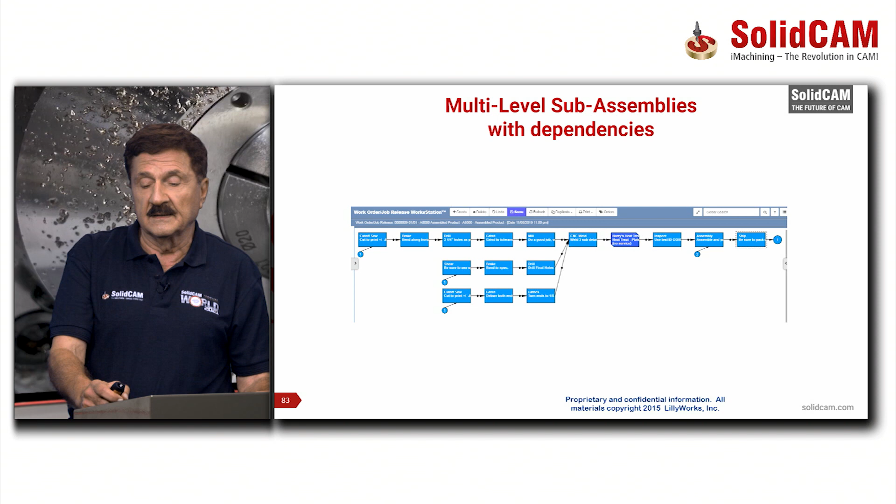So you all have limited internal resources, let's face it—a limited number of CNC machines, operators, tooling, material. And many times you also need external resources, such as heat treating, plating, anodizing. So managing production and improving production performance is a very complex problem.

Getting all those orders out by their respective due date is hard. I've asked people, and they say, we are always late. Managing production is very difficult and wildly variable—problems happen, things happen in the CNC machine, and there are a lot of moving parts in this process.

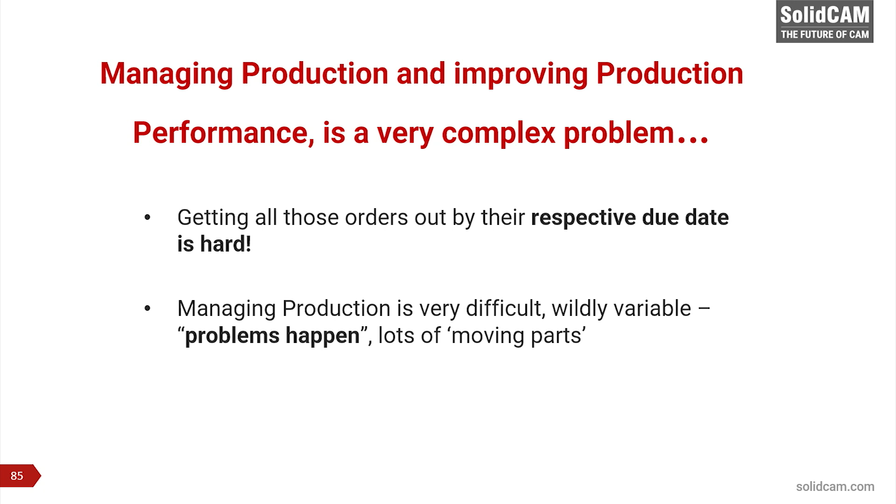So what have people been doing until now to do scheduling? Some people were using whiteboards—you see them in a machine shop with all these papers, a very non-optimal way to do it. Other people have been using a lot of spreadsheets to do scheduling. And people using ERP systems—these usually provide what I call traditional finite scheduling tools. I'll talk more later about why they aren't so successful.

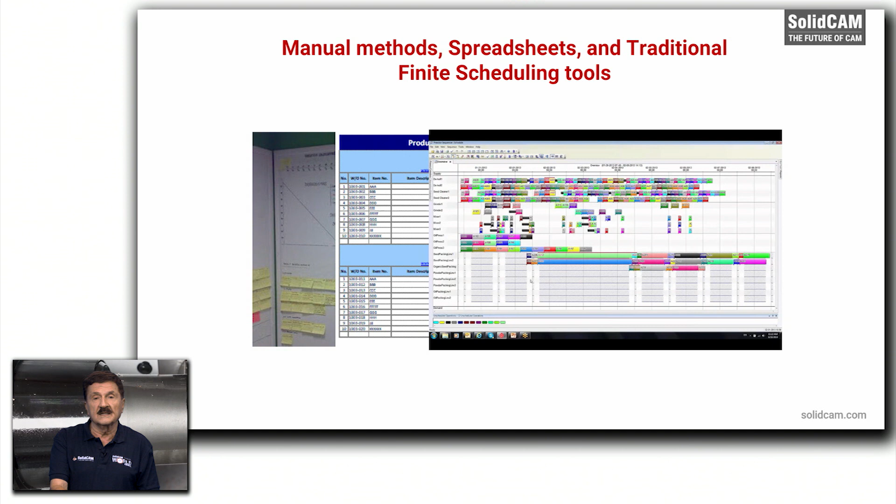So why is the struggle with spreadsheets and whiteboards difficult? Because they are very time-consuming to maintain—things happen, and you have to change them. Just trying to establish what needs to be worked on today or this week, and you don't have much future visibility to plan for future jobs. Also, whenever there are changes, you require frequent updating if the priorities are to stay accurate. So many times you don't update, and then your spreadsheet becomes obsolete. And especially with whiteboards, there's only a single copy in the whole machine shop, so it's hard to share across the organization. You want job information available to everybody to get maximum production.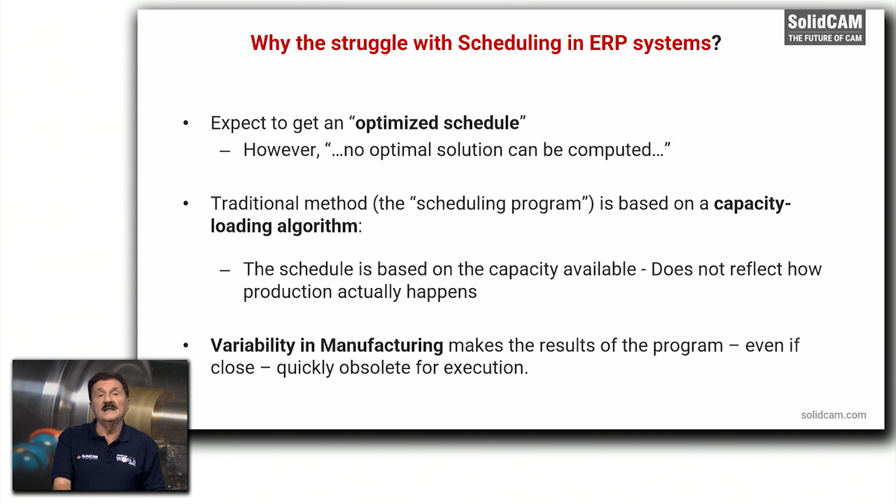Again, existing ERP systems also have some scheduling, and people using ERP expect to get an optimized schedule from it. However, this optimal solution doesn't exist—it simply cannot be computed, you can read more about it. The traditional method used in ERP is based on a capacity loading algorithm, so the schedule is based on capacity available, but it doesn't reflect how production actually happens. Variability in manufacturing makes the result of the ERP scheduling program quickly obsolete for execution.

Also, all ERP systems use the due date of the job as a priority, and this skews the true priority, especially in high-mix, low-volume type of work—for example, in CNC machine shops, which are doing too many new parts with few pieces of each.

So with traditional scheduling, you must start with very accurate estimated setup and run times, and these times become the schedule. Actually, the more sophisticated the scheduling program in the ERP, the more mysterious its black box becomes. So shop floor staff and operations don't understand where these priorities are coming from. In the end, they neglect it and do what they know how to do using spreadsheets.

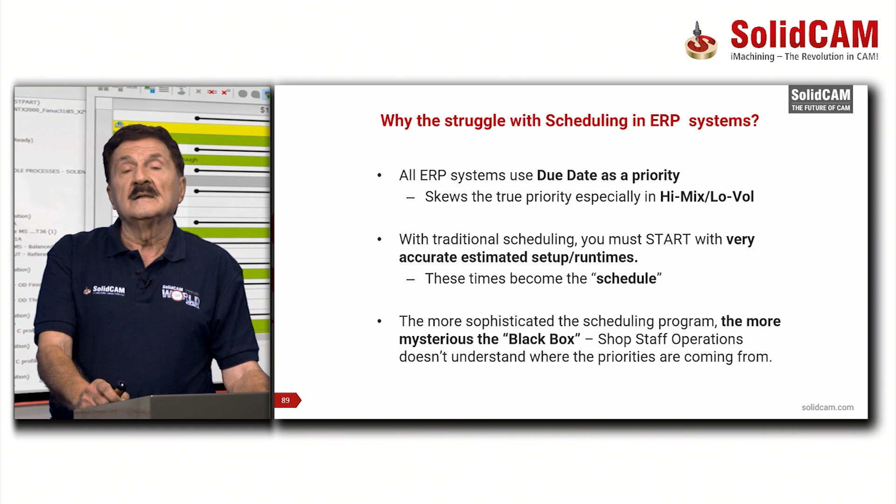So what we found out is that most machine shops with an ERP system really don't use its scheduling and instead still use spreadsheets. So how do we improve production performance? What we need is a new approach. We want to get rid of whiteboards, spreadsheets, and traditional finite scheduling, and focus on something called the flow. What do I mean by this?

What is the flow? All benefits in the machine shop will be directly related to the speed of the flow of information and materials. The question is, how can we publish the right information to where the work is happening so that production can make the right decisions that will enable improved speed of flow?

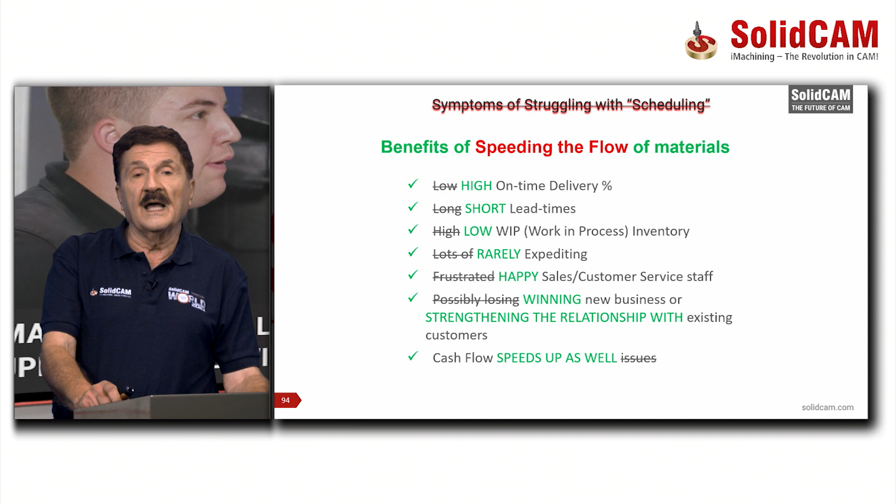So the benefits of speeding the flow of materials are, first, you get high on-time delivery percentage, short lead times, low work in process inventory. Rarely do you need expediting. You get happy sales and customer service staff. Also, you can win new business and strengthen the relationship with existing customers. And then the final advantage, cash flow speeds up as well. As jobs go out, you get better cash flow.

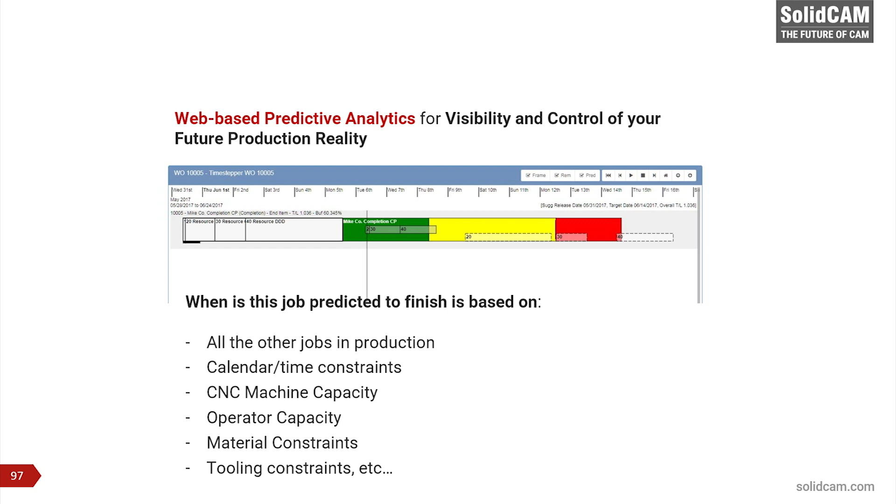Also, you have web-based predictive analytics. As we said, we want to know what's going to happen. When is this job predicted to finish? Which is based on all the other jobs in production, calendar time constraints, CNC machine capacity, operator capacity, material constraints, tooling constraints. So SolidFlow can provide you with predictive analytics to get the answer to these questions.

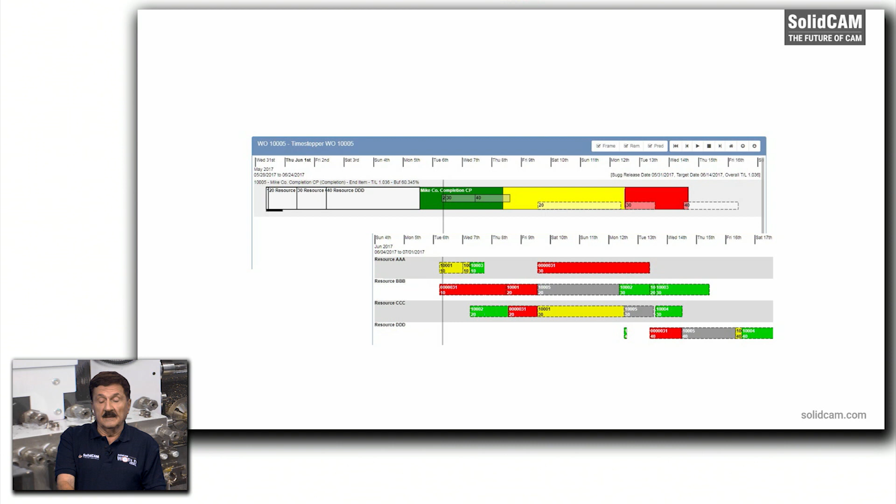And you are always seeing what's happening in your machine shop, in all the jobs. As you see, some of them are red, some yellow, and some are green. And this way you know what is the real-time priority.

So always use the right priority and not a due date, which means you cannot say if some job is going to be needed in 2 months, you should never start on it now, but start on it only 2 weeks before that. Not always should the due date be the deciding factor when you start a certain job. And SolidFlow helps you make the right decision.

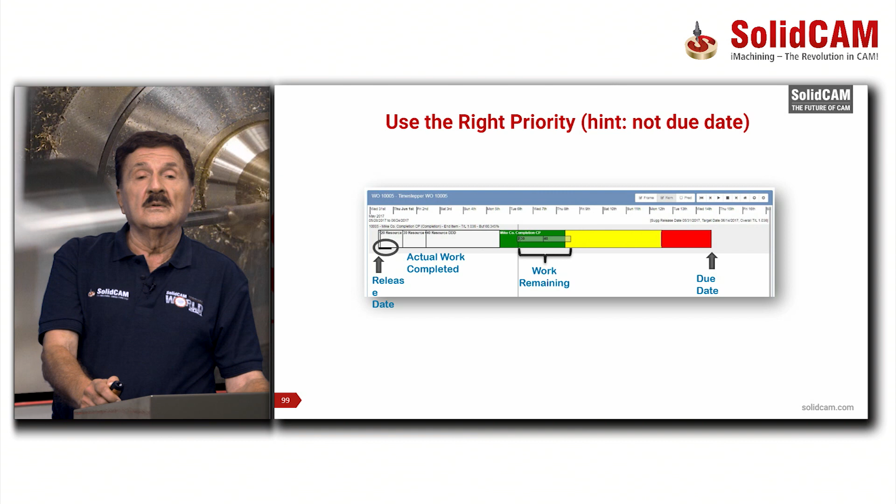It always checks what is the actual work completed, what is the work remaining, and what is the due date. So it can know what is the time protection remaining. And then it calculates something called the threat level priority, which is the percentage of work remaining divided by percentage of time buffer remaining. So the higher the threat level priority of the job, the more urgent it becomes to start on it. So for every job in the system, SolidFlow calculates this changing threat level priority.

This is not something constant. It's always changing according to what's happening in your machine shop.

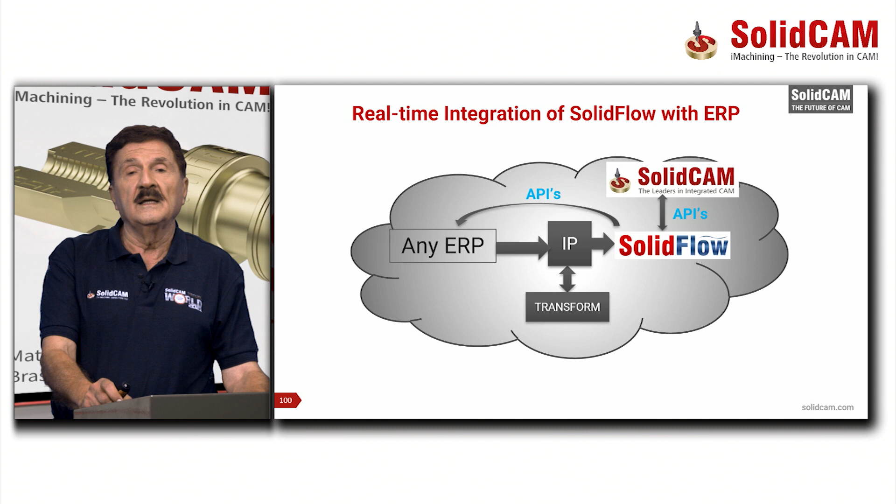Now, if you currently have an existing ERP system, and many of our customers do, SolidFlow can be integrated with their current ERP. As you see here in this diagram, SolidCAM can give information to SolidFlow, for example, tool table information. SolidFlow can connect to the ERP, and by connecting to the ERP, SolidFlow pulls your jobs and work orders from your ERP.

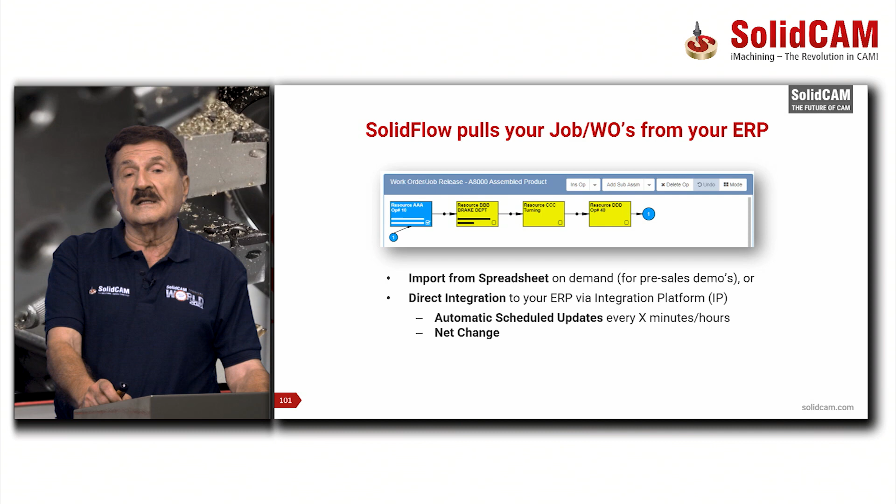So what happens if you don't have an ERP? In that case, it could take the data from your spreadsheet directly into SolidFlow and then continue to manage it through SolidFlow. But if you have an ERP, you can get a direct integration to your ERP via something called the integration platform, and you get automatic scheduled updates every few minutes or hours. As the data are updated in the ERP, they are updated also in SolidFlow.

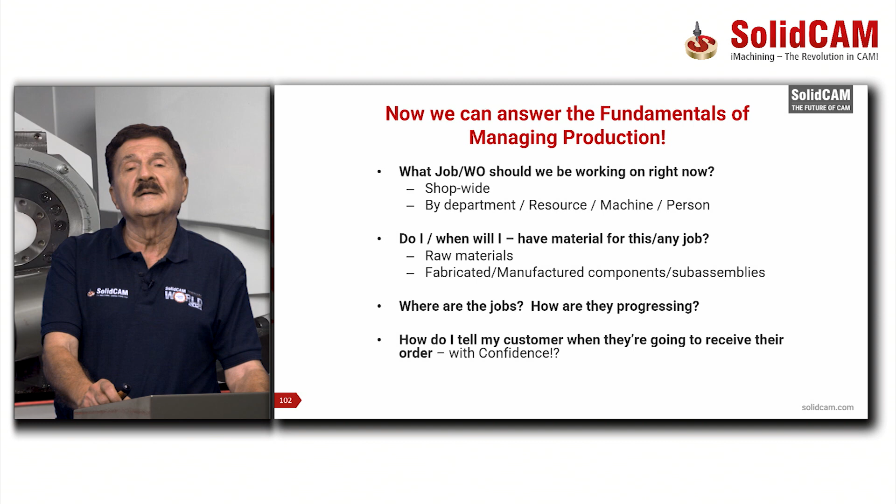So now, using SolidFlow, we can answer the fundamentals of managing production. What job or work order should we be working on right now, shop-wide or by department, resource, machine, or person? When will I have material for this or any job? Raw materials, fabricated materials, fabricated components, manufactured components, sub-assemblies. Where are the jobs? How are they progressing? How do I tell my customer when they are going to receive their order with confidence?

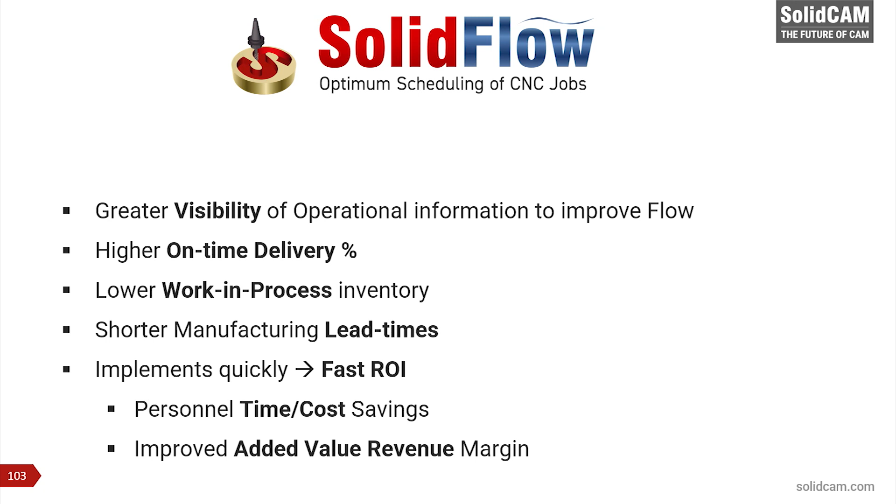So in the end, SolidFlow provides these great advantages. Greater visibility of operational information to improve flow. Higher on-time delivery percentage, very important for every CNC machine shop. Lower work-in-process inventory. Shorter manufacturing lead times.

And I could tell you, SolidFlow implements quickly. You could see fast return on investment. You will see personnel time and cost savings, and also improved added value revenue margin.

So now to summarize, the main premise of SolidFlow is the focus on the flow, making it visible and taking the right decisions to speed it. So in the end result, as CNC jobs flow smoothly out, money flows smoothly in.